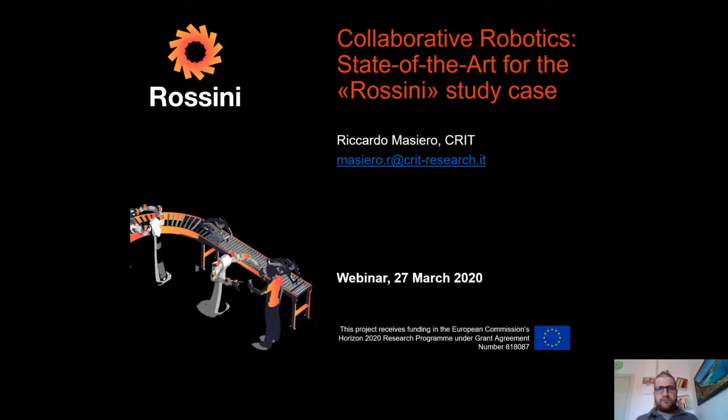In detail, during this talk, we will briefly see the whole consortium of the Rossini project and discuss the overall project scope. Then I will start by illustrating the Rossini use cases that involve three big companies of different sectors: IMA, Schindler, and Whirlpool. After the use cases, we will go through all the conducted state-of-the-art, speaking about both architecture and technologies.

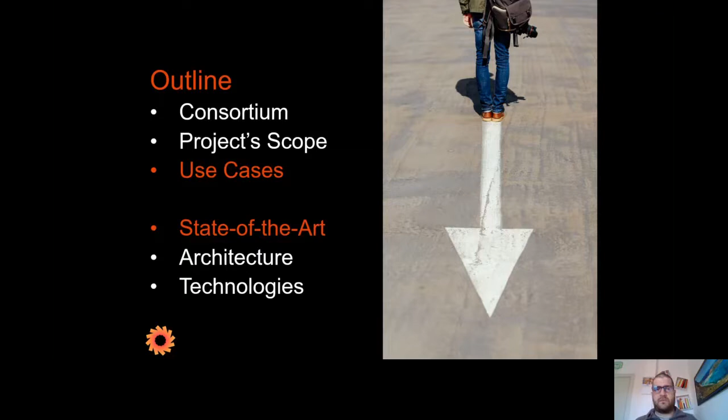The Rossini consortium entails 13 partners and 7 EU countries: Italy, Spain, Switzerland, Greece, Germany, Belgium, and Netherlands. More information about each partner can be found on the project website at www.rossini-project.com.

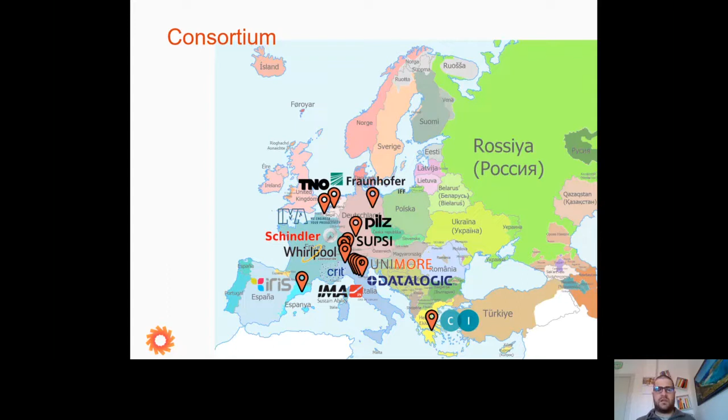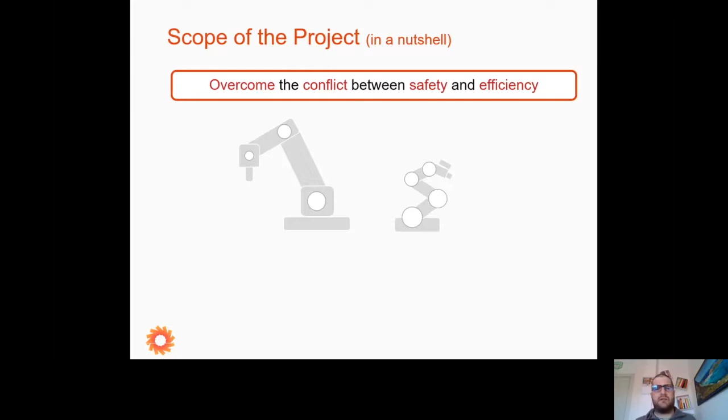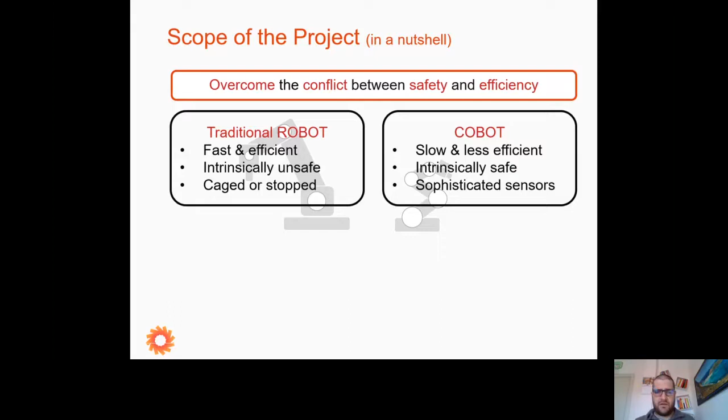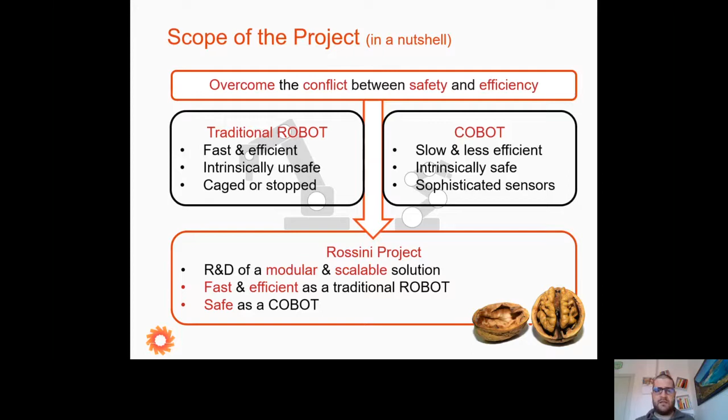In this slide, we report in a nutshell the scope of the Rossini project. This first sentence may be the project's payoff: Rossini wants to balance between efficiency and safety. Efficiency of the traditional robot solutions that, on one hand, are fast and efficient, but on the other are intrinsically unsafe and usually require cages for protection. And safety of the collaborative robots or cobots that are intrinsically safe, thanks to sophisticated sensors mounted on them, but slow and less efficient than traditional solutions of advanced automation. That's it: the Rossini project aims to research and develop a modular and scalable solution, fast and efficient as a traditional robot and safe as a cobot.

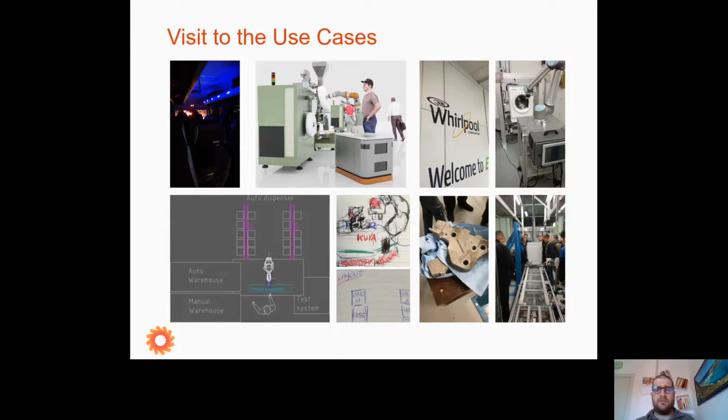Let's now see together the three use cases to be realized within the Rossini project. I'd like to start with this slide to tell you about a nice idea of the Rossini coordinator, Datalogic. At the beginning of the project, December 2018, according to the project plan, we had to visit the three use cases and corresponding facilities. Datalogic's idea was to do this all together in a 3-day trip. By bus, we departed from Bologna to reach Locarno and then Varese. After each visit, all the participants took part in brainstorming sessions to analyze the use cases and define the first needed requirements. Overall, it was a very nice experience to know each other and pave the way for the next steps of the project.

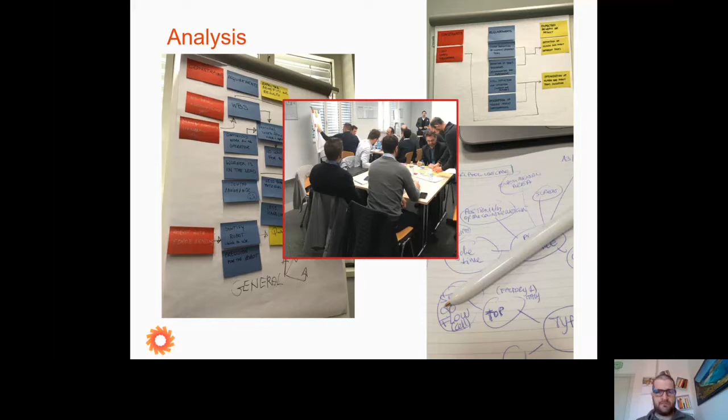Going into the details of the use cases, we can start with IMA, world leader in the production of automatic machines. Among those produced by IMA, this machine to fill tea bags and pack them into a box is the object of the Rossini project.

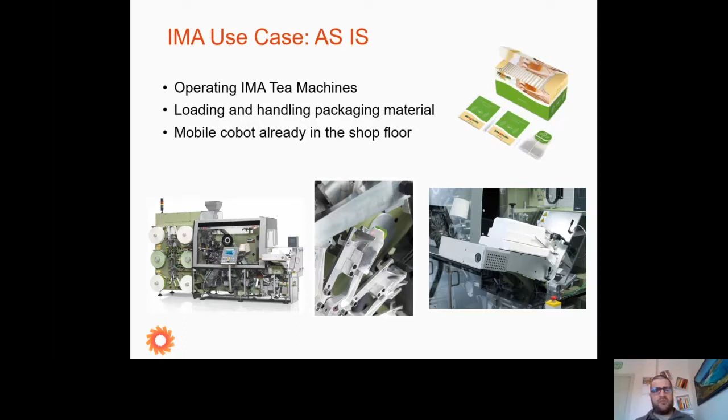The main objective is to find a suitable cobot solution to help operators loading and handling packaging material that comes in heavy coils. IMA already engineered a cobot solution in the shop floor, but it needs to be improved in efficiency and productivity. Furthermore, IMA is looking forward to a cobot solution able to automatically recover the machine from micro stoppages.

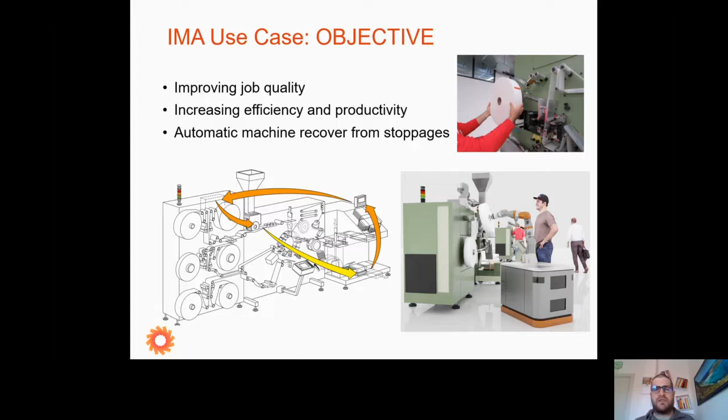The challenges of this use case are the current slow speed of the AGV, namely the mobile robot that mounts the robotic arm; the impossibility to distinguish between a human and an inanimate obstacle, by which it will be possible to keep higher speed than those required when approaching humans; and the still limited human-robot interaction.

The foreseen solution for this use case includes a new integration in terms of mobile robot and robotic arm, AI technologies to recognize humans, and a new sensing layer concept that Rossini aims to develop, called RS4, acronym for Rossini Smart and Safe Sensing System.

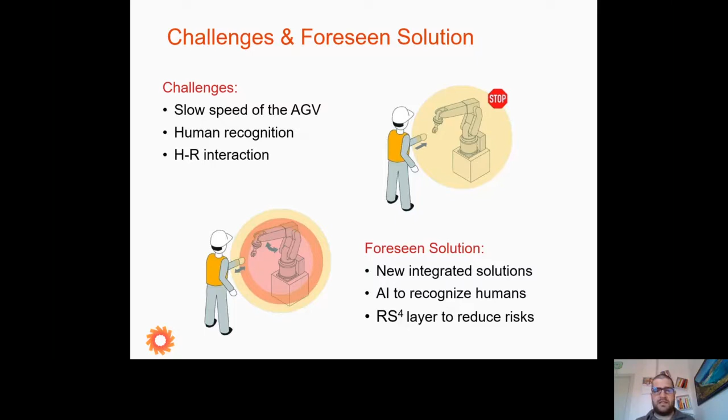The next use case is Schindler's. Schindler is a world leader company for providing elevators, escalators, and moving walks. In this use case, we have a lean certified assembly line of elevator panels. This line is currently fully manual and made of two steps: the kitting station and the assembly line.

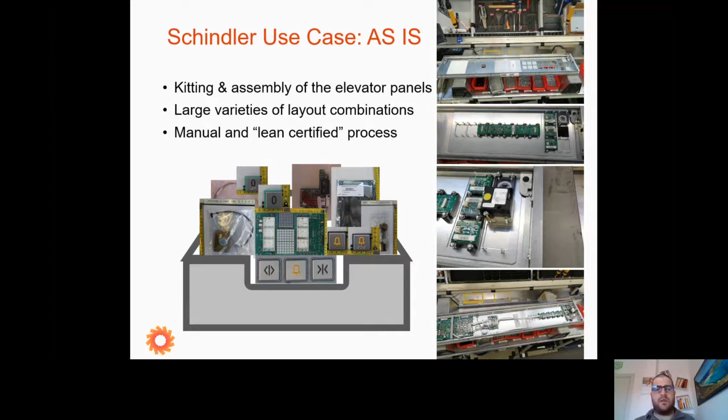The overall objective of Schindler is to both improve job quality in terms of ergonomics and increase efficiency in terms of productivity. This is foreseen by redesigning the whole layout of the production line, moving from a solution where kitting and assembly are separated to a solution where they are realized together in the same space of the shop floor, with robot and human operators working together.

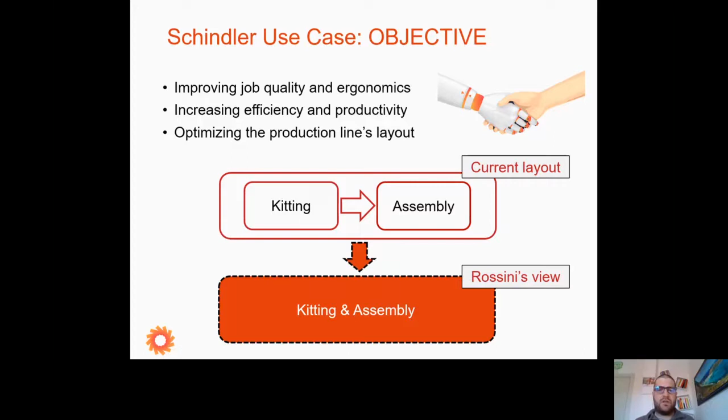One first challenge of this use case is the large variety of layout combinations for the elevator panels to be manufactured. This is due to the high customization requirements for these kinds of products.

Another challenging element is the close interaction between the robotic arm and the operator. Commenting on this, I always like to refer to the first scenes of the Iron Man movie, where Tony Stark is working in the cave to build his first armor prototype. Here I imagine almost that kind of interaction.

The foreseen solution takes a collaborative robot arm, with suitable speed and reach, and a redefinition of the current way of working.

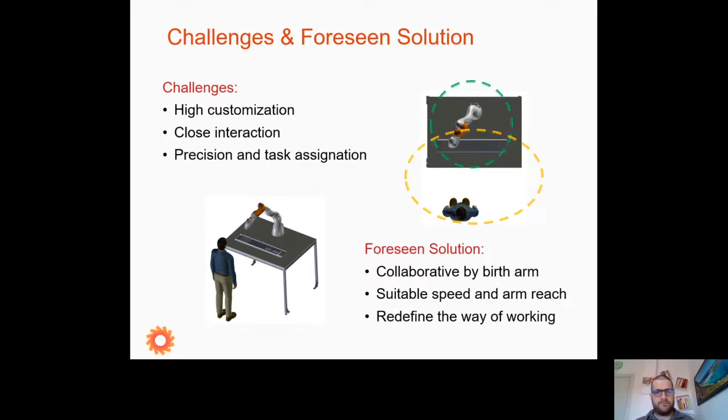Whirlpool is the third use case presented in Rossini. Here we have two assembly lines of washing machines. The overall task to perform is the pick, place, and fix of counterweights that might be quite heavy, up to 13 kilos.

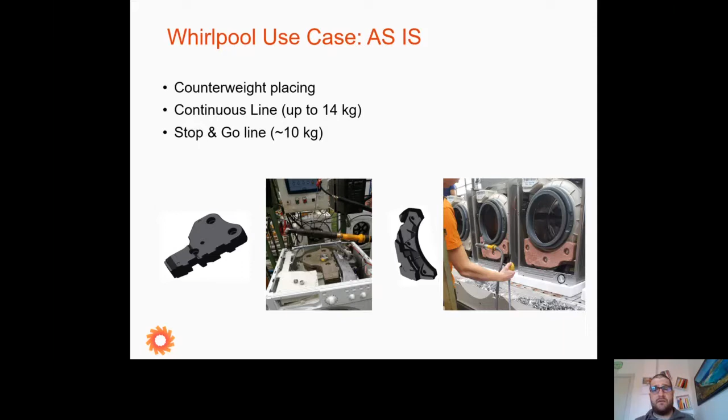Therefore, the first objective is to improve the job quality in terms of ergonomics, maintaining the takt time of the production line and designing a concept solution that can be applied also to other product lines.

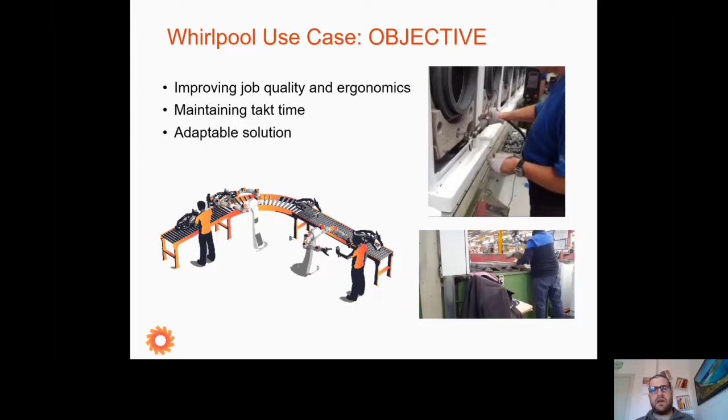The main challenges here are clearly the heavy payload that the robotic arm must be able to handle, the need to respect a predefined takt time, as well as the task assignation between human and robot. For example, we need to answer questions such as: will the robot help the operator also in the screwing activity, or just for placing the counterweights?

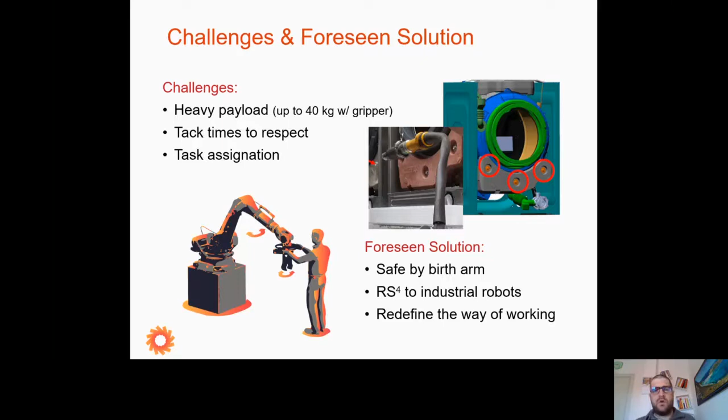The foreseen solution is either a safe-by-birth arm or the possibility to use the sensing layer of the Rossini platform with industrial robots. Furthermore, also in this case, we will redefine the current way of working.

Now, in order to see how the Rossini project wants to realize the illustrated use cases, let us take a look at the state-of-the-art conducive to paving the way for these realizations.

For those of you not used to European projects, it will be enough to explain that such projects are usually organized in modules called work packages. A work package is a set of activities that address a specific topic to be realized within the project. In the following, we will mention the technical ones, since they can leverage the results of the presented state-of-the-art.

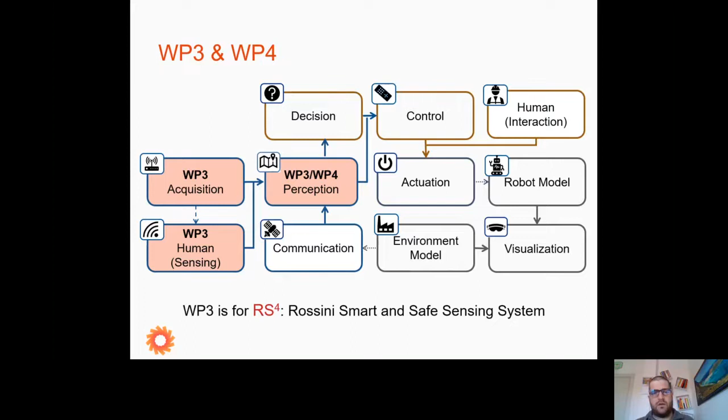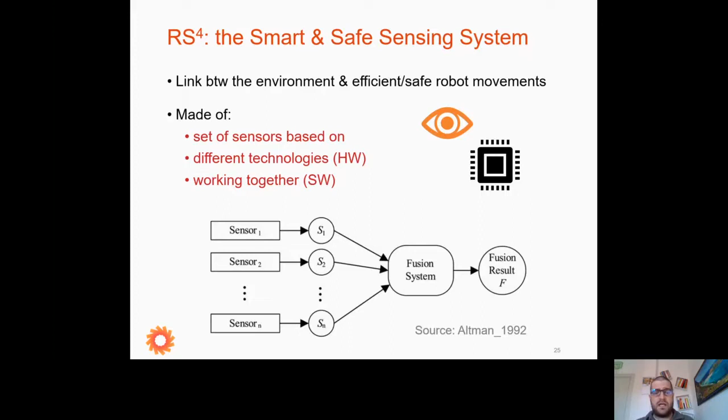RS4 stands for Rossini Smart and Safe Sensing System, and it is the link between the environment and an efficient and safe robot movement in the working space. RS4 is made of a set of sensors based on different technologies that work together. Roughly speaking, RS4 is a hardware and software solution for data fusion, with the overall objective to realize precise mapping, object localization, and 2D, 3D object reconstruction.

The first need for Rossini in this context is to identify and select the enabling technologies, with a focus on safety-related solutions. In particular, the investigated technologies have been analyzed considering parameters such as robustness, predictability, reactivity in real time, the possibility to configure them for worst-case scenarios, and to jointly measure distance and speed of an object.

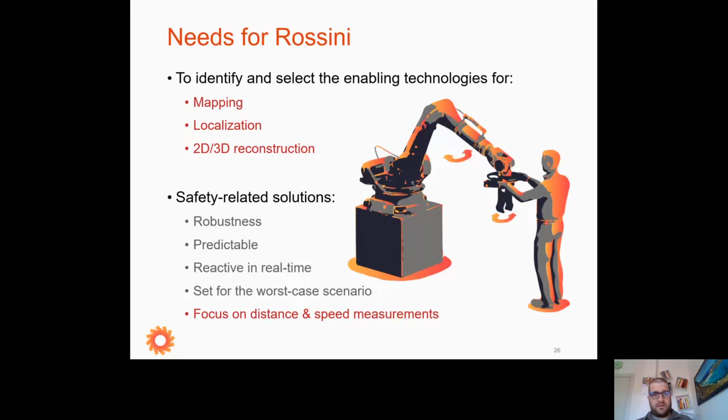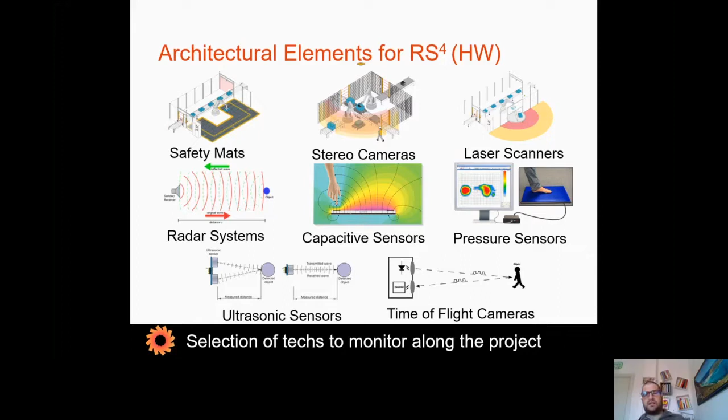In this slide, an overview of all the investigated technologies in the deliverable. You can find a description and discussion for each of them in the publicly available material. Concerning Rossini, the state-of-the-art output allows us to select those technologies to monitor along the project. The most suitable ones will be adopted when necessary or when a sufficient degree of maturity is reached.

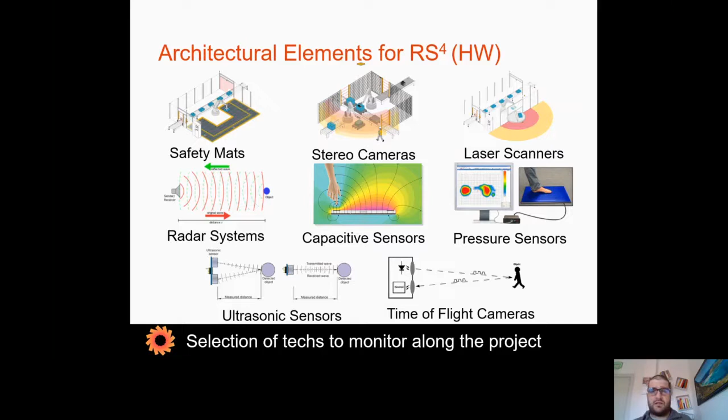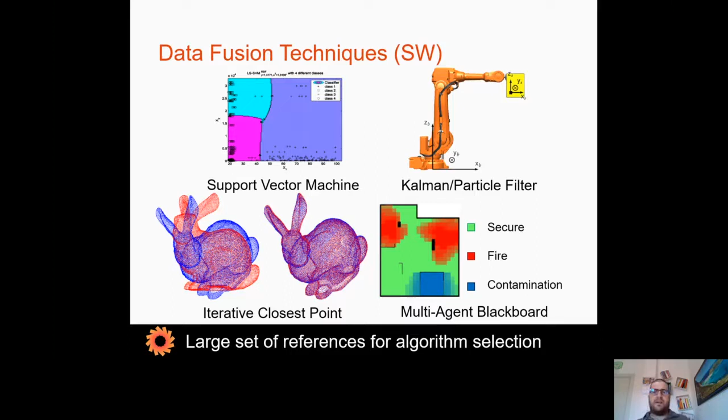Similarly, a large set of references for data fusion algorithms has been selected, described, and discussed from the point of view of safety and the real-time functionalities provided. The deliverable describes both more traditional approaches and newer or hybrid ones. This large set of algorithms provides the consortium with a solid knowledge base for future developments.

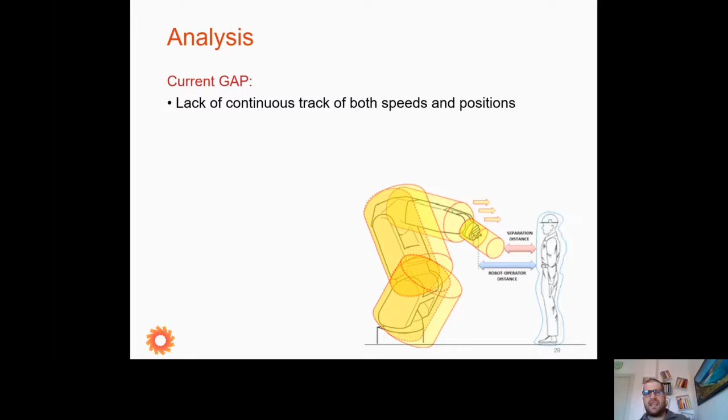As main insight from this part of the state-of-the-art, we notice that there is a lack in current technology for continuous tracking of both speed and position.

Concerning the use case needs, it clearly emerged the indication to identify and well-characterize the different moving areas of each use case. In this manner, it will be possible to equip such areas with the different and most suitable kind of sensor.

Finally, the expected innovation that Rossini will bring to the current state-of-the-art is a whole framework able to orchestrate heterogeneous technologies, connected via both safety and non-safety buses, and a dynamic mechanism to adapt robot behavior according to the task to perform, the foreseen interaction with the operator, and the actual human-robot relative position.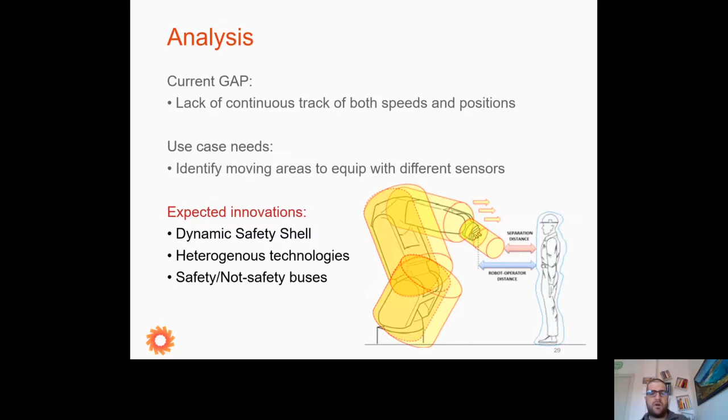Let us move from the sensing and perception system to the safety robot architecture, Work Package 5. Here, the main contributions to the state-of-the-art have been provided by Unimore, Whirlpool, and Pilz.

This topic is related, recalling the previously seen building blocks, to the solution that can be implemented to let the robot decide what to do in the environment, the so-called cognitive layer, and make it do it, namely the implementation of the control and actuation steps.

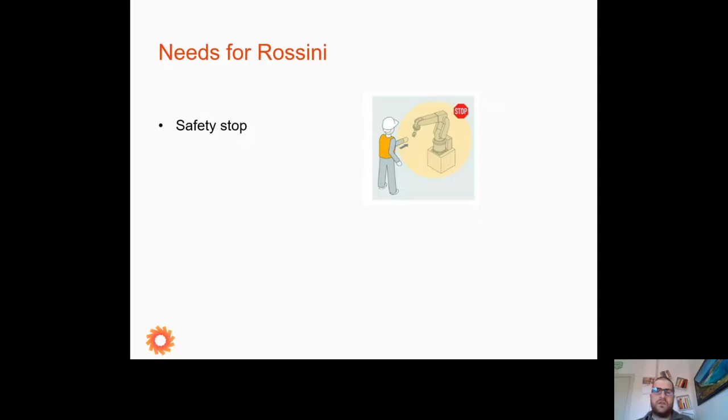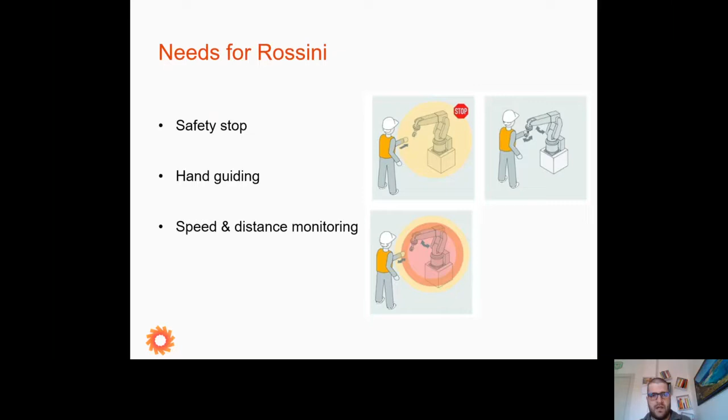Here, the needs for Rossini are those recalled on the website. First of all, a safety stop, then a mechanism to hand-guide the robot, a speed and distance monitoring system that we already mentioned before, since it is enabled by the RS4 layer, and finally, a paradigm to limit power and force.

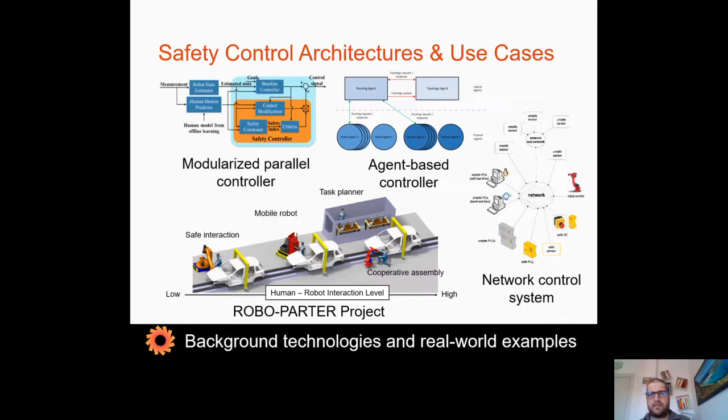With these concepts in mind, the state-of-the-art deliverable considers background technologies and real-world examples to compare them with the envisioned Rossini architecture, so as to better highlight the Rossini innovative potential and spread this awareness, both inside and outside the consortium.

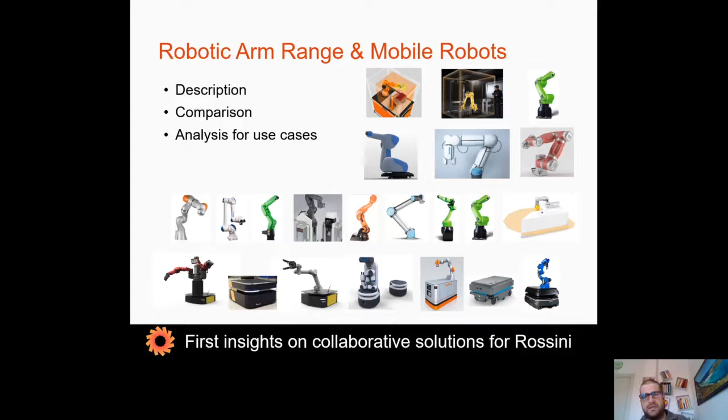Furthermore, a wide survey on the available technologies for both arm and mobile robots has been done, with the objective of having, on one side, a complete overview of the current market offering, and on the other, collecting the necessary information needed to make the first investments in building the final solution for one or more use cases.

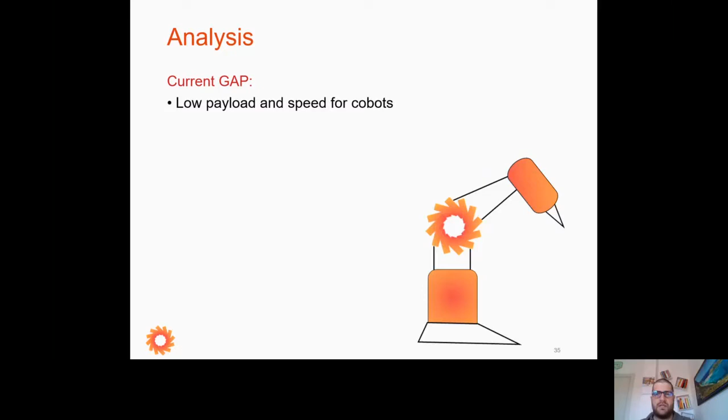To sum up, this chapter of the state-of-the-art, and in particular the robot arm analysis, allows us to highlight how low payload and slow speed for cobots is a technology gap that must be overcome for Rossini.

Considering the first need for the Rossini use cases, this is about the identification of the right arm-gripper solution for each one of them. Finally, the expected innovation of the project is a mechanical redesign of a collaborative arm that will include a force feedback mechanism and will lead to an augmented intrinsic safety of the robot.

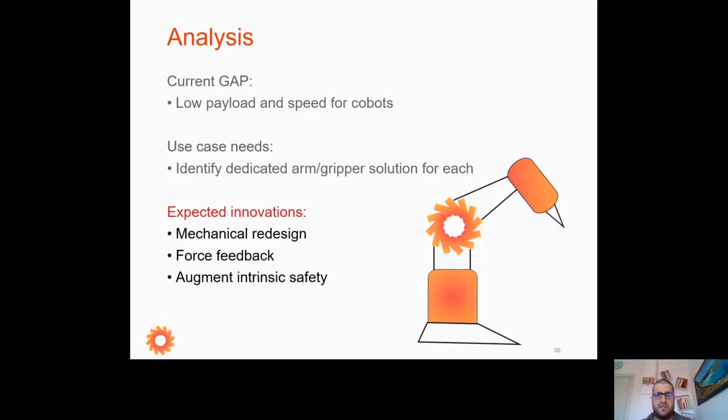The next part is about human-robot mutual understanding and job quality evaluation, topics that frame within Work Package 6. This part leverages the contributions of TNO and Fraunhofer IFF.

In this chapter, we address two main topics: HMI, or human-machine interfaces, and environment modeling, focusing on one fundamental aspect: how to measure job quality.

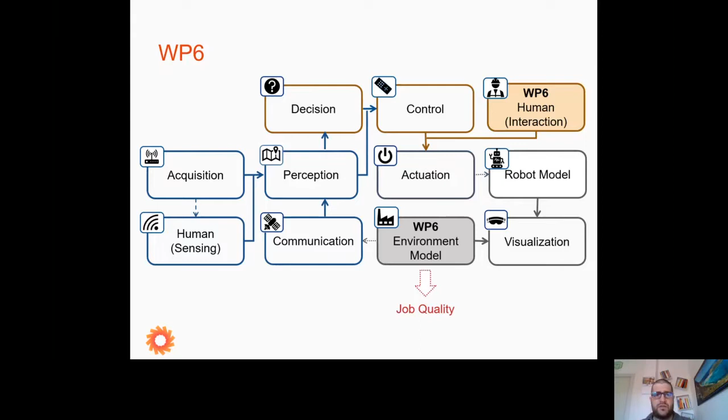In particular, within Rossini, we are interested in evaluating scenarios of co-working for humans and robots, where the first objective is to define and measure job quality indices that go beyond the power and force limiting paradigm as safeguard mode. Furthermore, we would like to be able to perform preliminary evaluations about a given industrial scenario in the perspective of human-robot collaboration in terms of performance and their possible improvements.

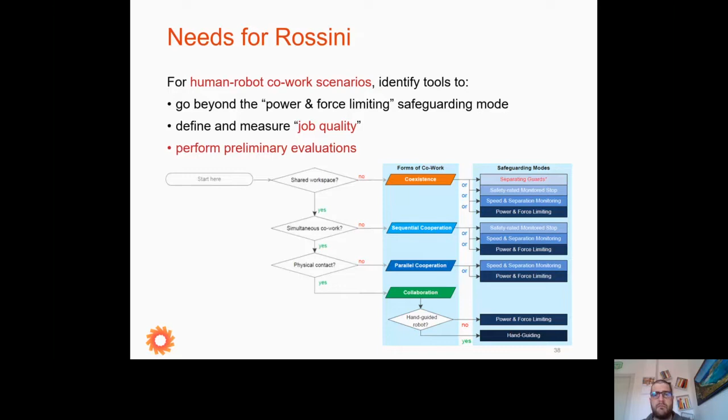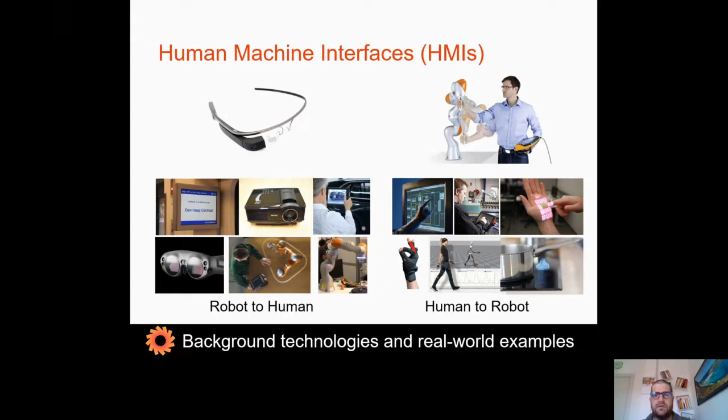First, in this chapter, you can find a nice overview about human-machine interfaces from both a robot-to-human and a human-to-robot communication perspective. The overall objective here is to provide examples of all the different types of interaction that may lead to the evaluation of the human factor.

And to evaluate the human factor, also a set of references for task allocation, job quality, and ergonomics evaluation tools is provided. From this background, a tool selection for Rossini's objectives has been identified. This paves the way for the construction of a framework of job quality evaluation specifically designed for human-robot applications.

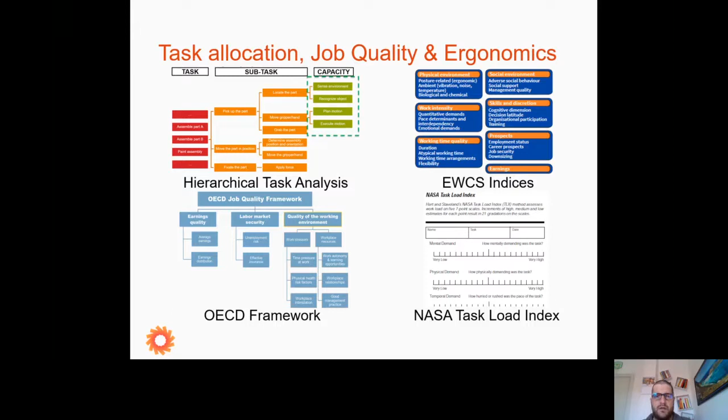In this part of the deliverable, the main observations related to the current technology gap are on the fact that there is a lack of high-performance robotic technologies, a missing safety assessment at the system level, and a low acceptance from the workforce towards robots as co-workers.

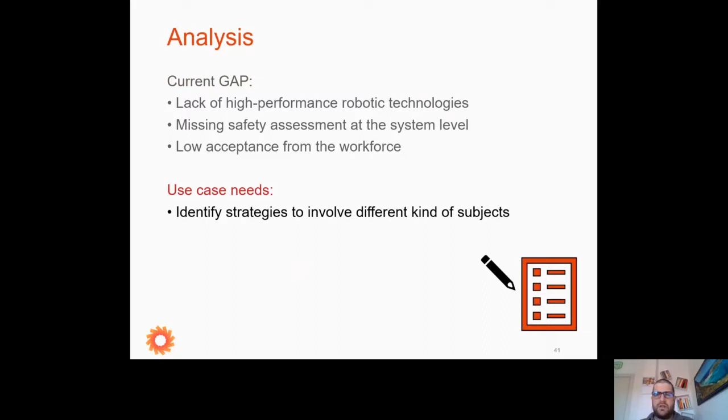Concerning the use cases, reasoning from the point of view of the workers highlights the necessity to identify different strategies to involve different kinds of subjects, since in some cases they are the employees of the production lines, in others the operators of the final customer.

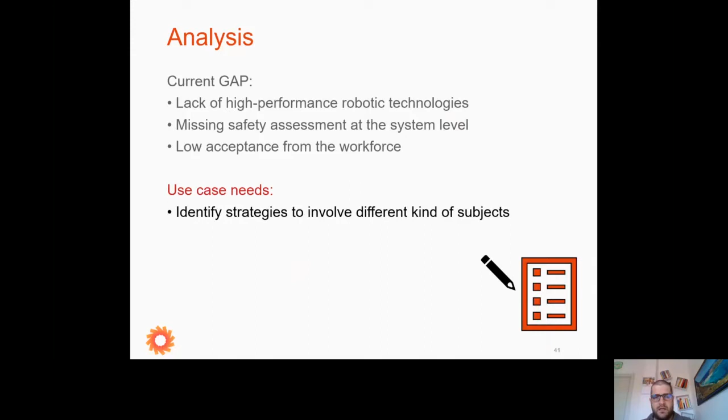The overall expected innovation is related to the creation of a new framework for job quality assessment, specifically tailored for collaborative robotic scenarios.

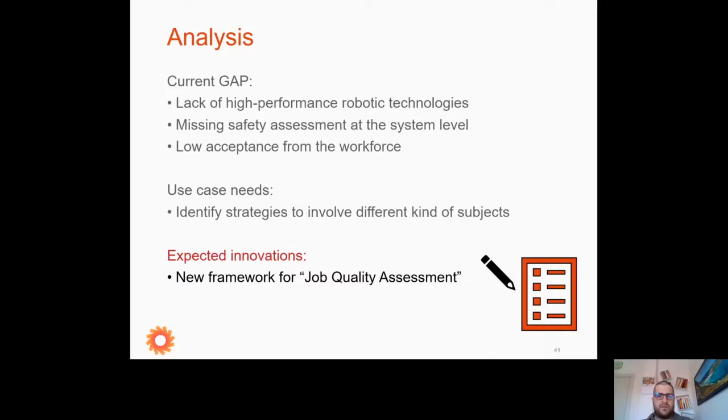We are now approaching the last part of the state-of-the-art presentation that is related to Work Package 7. This part is mainly based on the contribution of Unimore and Iris.

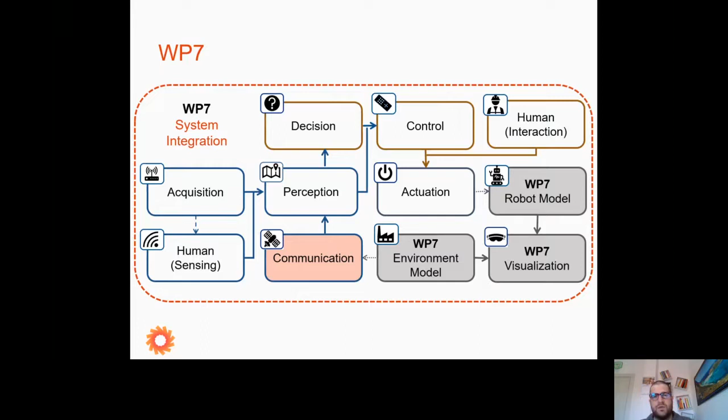Work Package 7 is about safety system architecture, namely how to integrate the human factor within the overall architecture of the Rossini platform. This integration must be done at the system level, of course, including all the building blocks seen so far. To realize such integration, it is important to consider all the communication solutions that link the environment with the robot. In addition, the design and realization of a virtual design tool to properly define and study the overall Rossini concept is treated.

The integration needs for Rossini can be summed up in this slide. In a unique platform, we want to frame both the safety and the production system, as well as the human factor.

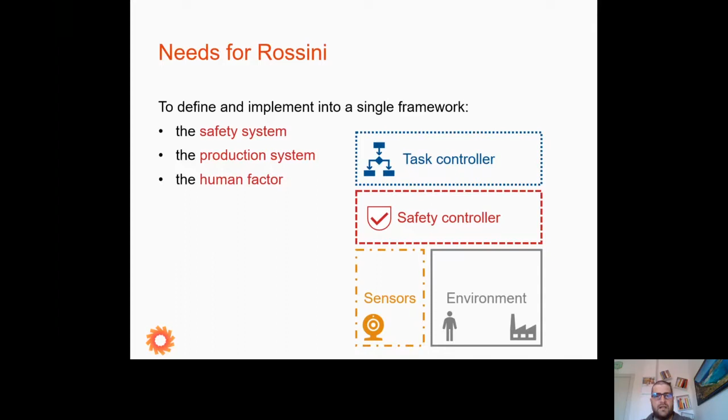To this end, a section of the state-of-the-art deliverable is dedicated to the issues related to the integration of the human factor within the Rossini architecture. In particular, two key elements emerge from the conducted analysis: the necessity to build reliable human behavior predictors and to include in the platform design a robust and effective robot-to-human feedback solution.

As overall outcome, a list of useful considerations and references for the future development of the project has been provided.

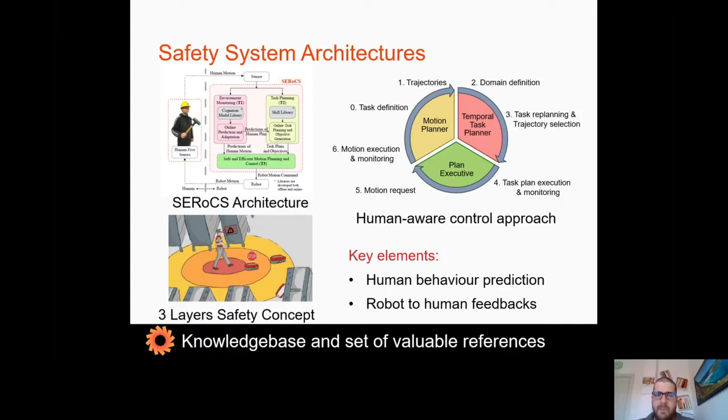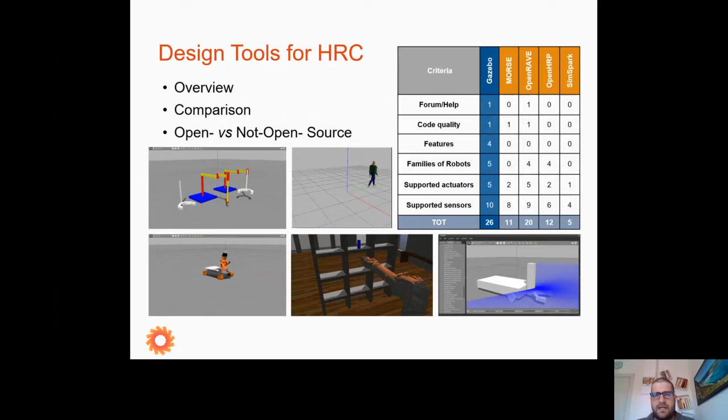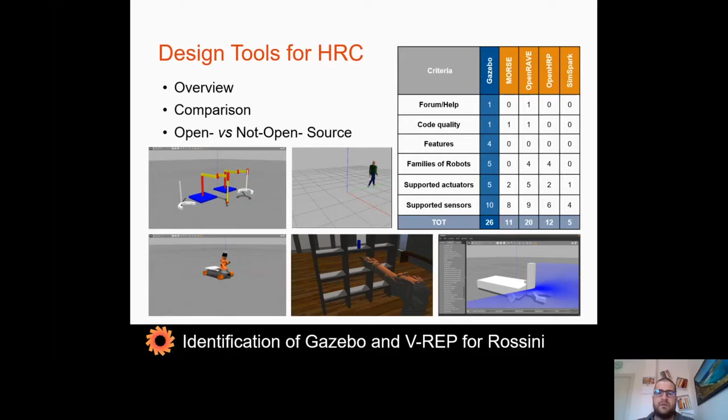Finally, concerning the virtual design tools to realize, several open and not open source programs have been identified, investigated, and compared against each other. The result of this comparative analysis is the identification of Gazebo among the open source solutions and V-REP among the not open source ones as the best tools with which to start building the overall Rossini solution.

To conclude, we can say that the current state-of-the-art gap as regards the Rossini project goals follows three trends: an increase of complexity and unpredictability of advanced automation solutions, a lack of robot integration along with a lack in programming expertise, and finally, a tendency to productivity loss for guaranteeing safety.

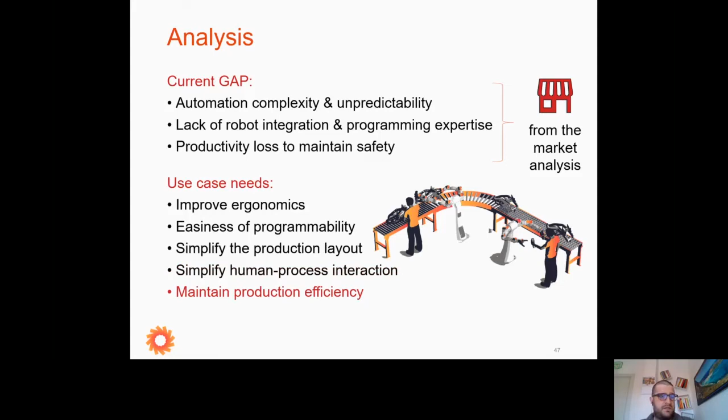All these trends come from market analysis conducted for the project proposal and included in the state-of-the-art deliverable itself. Supported by them, the corresponding use case needs have been identified and listed here, starting from improved ergonomics, easiness of programmability, simplifying the production layout, simplifying human-process interaction, maintaining production efficiency, and exception management.

The Rossini project aims to fill the current gap and answer all these needs with a unique platform that defines an architecture based on heterogeneous technologies, a design tool and a risk assessment procedure to apply the Rossini concept to different scenarios, and last but not least, a job quality evaluation framework specifically tailored for human-robot collaboration scenarios.

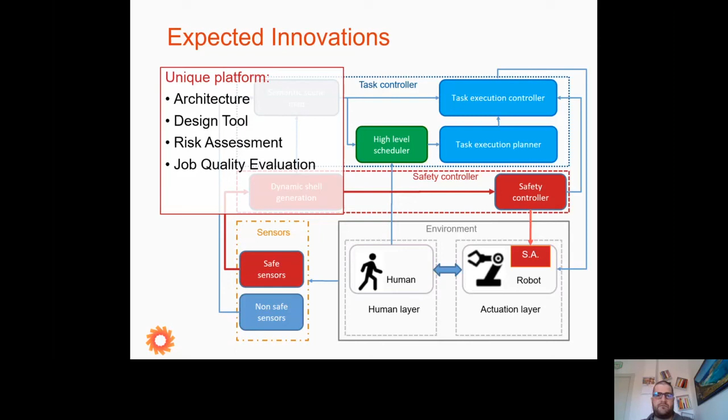This concludes my talk that I hope you found interesting and useful.